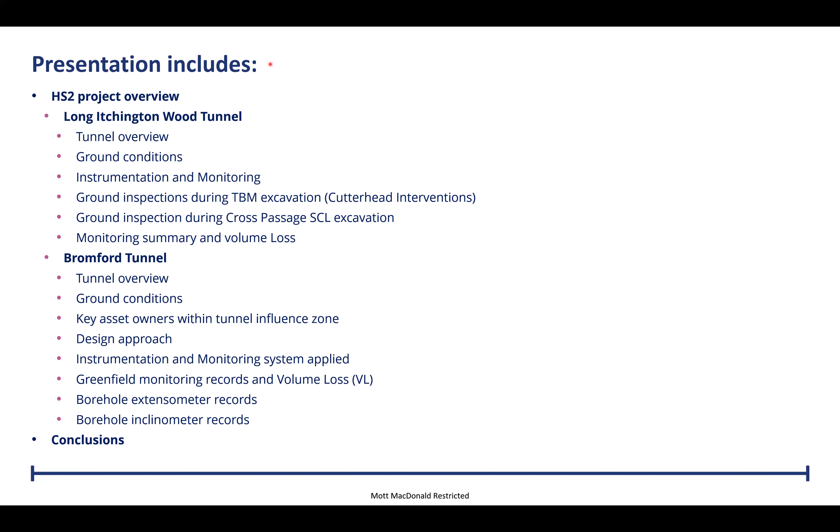This presentation will include an HS2 project overview, and we're going to speak about the two tunnels that one has been completed, one is ongoing. These are the two tunnels on the north part of HS2. One is Long Itchington Wood Tunnel, and the other is the Bromford. We're going to speak about the tunnel overview, the characteristics, then the geological setup. We'll talk about instrumentation and monitoring, what has been installed, and how we are doing ground inspections during tunneling, either through the TBM or on the cross passage traditional tunneling method. Then we'll see some monitoring summary in terms of volume loss and the performance we have achieved so far. For the Bromford tunnel, we'll speak about the same subject, following the same design approach as Long Itchington, but in this case the tunnel, which is ongoing, is much more critical because it's longer and crosses an urban area, which is why the instrumentation monitoring system applied is much more comprehensive. We will discuss that, see some readings we have so far, and then conclude.

As an HS2 overview, maybe most of you know this already. It's a new high-speed railway built from London to the Midlands, with a length of 140 miles. There are 4 new stations in this alignment, 2 major depots, 32 miles of tunnels, and over 500 bridging structures.

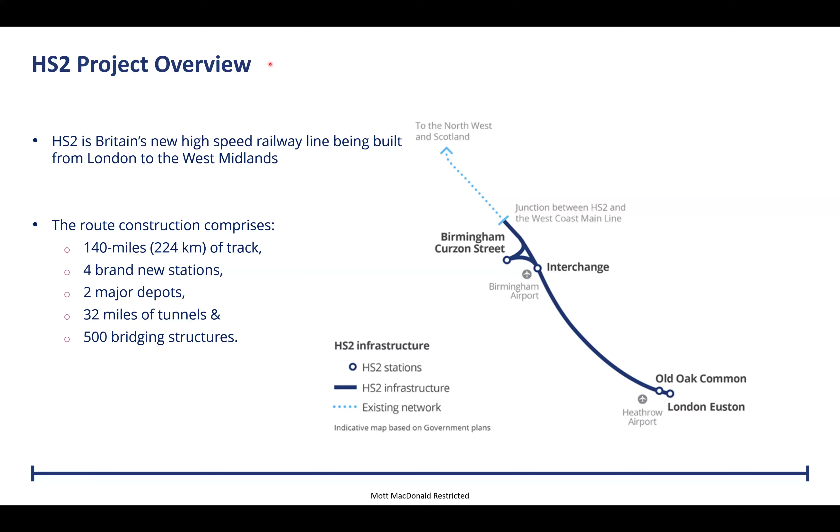Balfour Beatty Vinci JV, which we call BBV, has been awarded the contract to construct the northernmost 90 kilometers of the HS2 route. This starts from Long Itchington, the tunnel which is the first part of our project, located in Warwickshire. Then it goes from the south to the north, and one branch goes west inside Birmingham city, where we have the second tunnel, and another branch goes north, where it will eventually join and connect to the West Coast Main Line.

This contract covers 90 kilometers. Among other things it has 11 kilometers of viaducts, 62 overbridges and underbridges, embankments, cuttings, underpasses, and a lot of other structures. And then we have the 2 tunnels, which we are going to further analyze in this presentation.

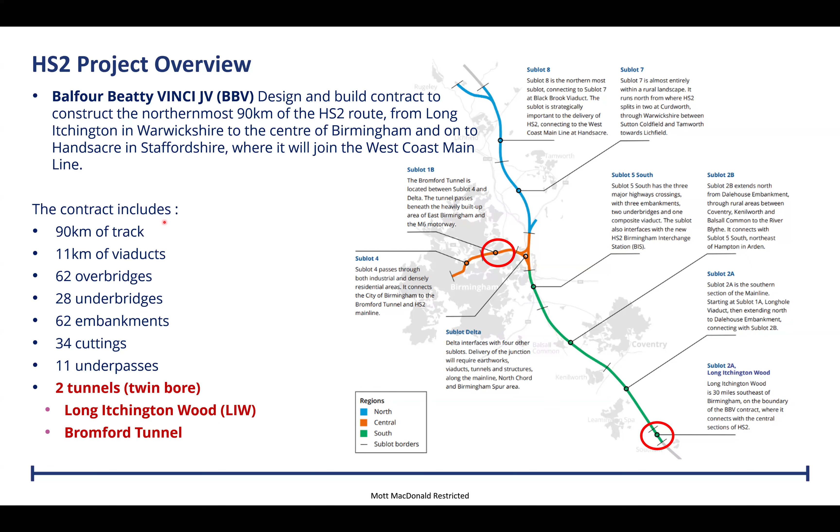So the Long Itchington tunnel has already been built. This photo is from December 2021, showing the launching of the first TBM from the north portal. This tunnel has been constructed with one TBM, which completed the first drive, was then dismantled, all the pieces came back, and then it was put together again to start the second drive.

So we have 2 single bores of 1.6 kilometers. This also has 3 cross passages, which connect the up line bore with the down line. As we said, we used one TBM called Dorothy. The excavation diameter of the cutter head was around 10 meters, and the internal diameter of the tunnel was 8.8 meters.

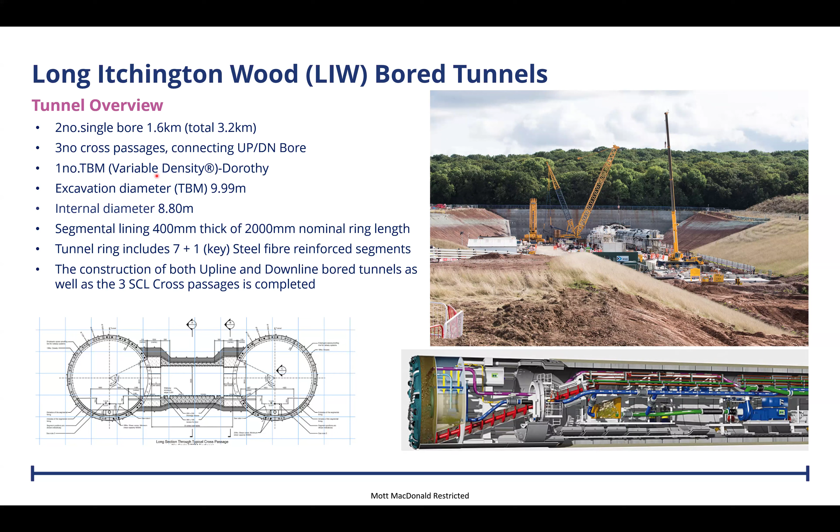The segments formed a segmental lining constructed by the TBM during advancing. We had 400mm thick rings, each ring with a 2 meter length, and a full ring comprised of seven segments plus one key segment, steel fiber reinforced. We also had reinforced rings at the portals and at the locations of the cross passages to mitigate additional stresses. This tunnel, including the cross passages, has now been completed 100%.

In terms of geology, this is the layout, an extract from the 1 to 50,000 scale geological map of the area. On the northern part we have the Mercia Mudstone Group, where we meet the Sidmouth Formation, among other formations shown in the next table. Close to the exit along the drive, at the south portal, we encountered the Penarth Group, which was overlying the Mercia Group.

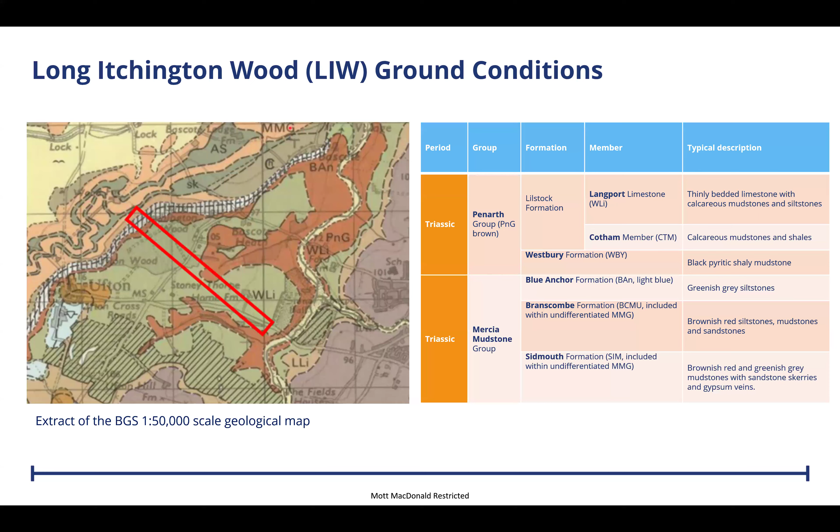So it's better to see the section. That's the section.

This is the north portal, where you have seen the photo, and this is the hill that was the reason for the tunneling. It was an ancient woodland that has been crossed.

Both drives have been from north to south. Regarding ground conditions, we start with the Mercia Mudstone, which has three formations: the Sidmouth formation, the Branscombe, and the Blue Anchor. Then we have overlying that the Penarth group, Westbury and Cotham mudstones, which we encounter towards the end of the drive.

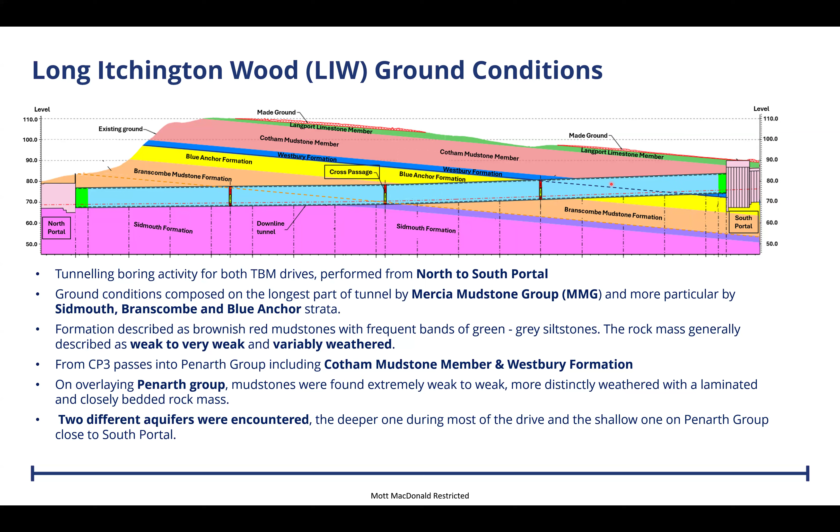The ground is a soft rock, actually. It's mudstones, soft rock. It's weak ground in terms of uniaxial compression strength, and there was a lot of discussion before the tunneling.

Now we know, of course, but there was a lot of discussion regarding weathering zones, and basically what the water ingress in the tunnel would be. We had two different aquifers: the low aquifer, which was in the Mercia Mudstone, and the shallow aquifer, which is in the Penarth group.

However, due to the low permeability of the material, we encountered no major problems in terms of excavation when we had to stop the TBM and when we opened the cross passages.

The design approach was traditional, usual. We had a GI investigation, and once we had the lab test parameters, there was a lot of work done over the past years to define the characteristic values.

There was a big discussion, as I said, regarding permeabilities, because the tests in the GI gave some very isolated results, and we weren't very confident there would not be higher ingress in the ground. That's why we had to introduce uncertainties in the design. However, as I said, in this particular tunnel, as we know now, the permeability was quite low, and we didn't have much ingress.

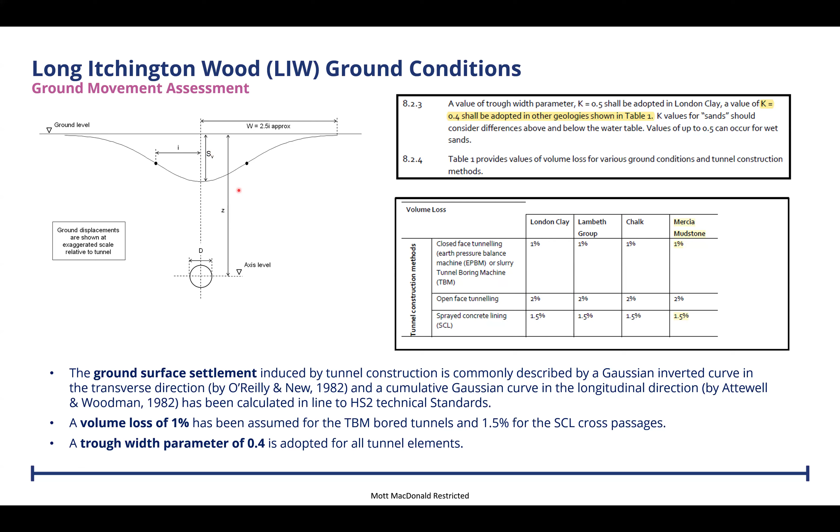Then the second part was to define the operational parameters of the TBM. The TBM is working in a way that has to balance the earth pressure and the water pressure. So based on the GI, the assumptions, the covers, and the waterhead, there was an equilibrium of ground wedge and water pressure design along the tunnel to define the envelope, let's say, of the upper and lower bounds of the face pressure for the TBM.

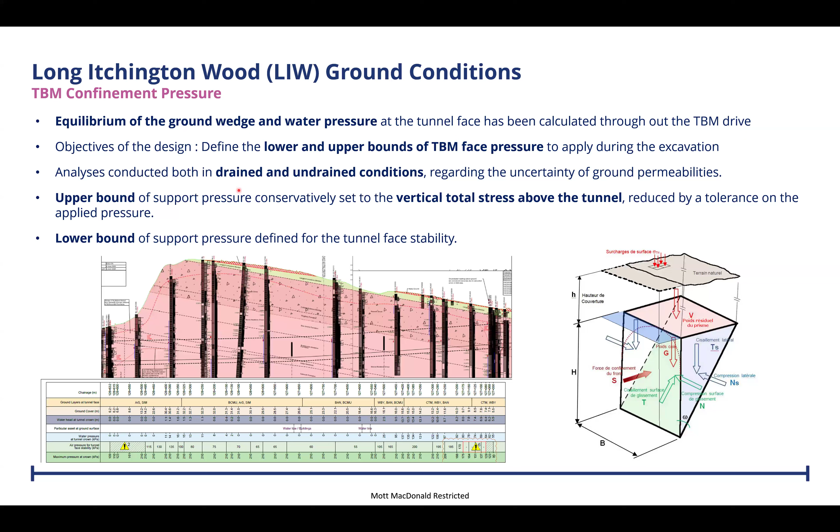The upper bound is basically defined as the vertical total stress above the tunnel. In some cases we have limitations from the design - pressure cannot go beyond a certain limit because the designer of the segmental lining doesn't allow that. But in general, we didn't want to go beyond this vertical total stress. The lower bound is to support the wedge, the face pressure and the water pressure - so to be always a bit above that.

Grouting is a second part that has to be above the confinement pressure. So this design has been done for the tunnel and has been applied, and we're going to see later what the performance was.

Now, instrumentation monitoring in this tunnel was not so critical in terms of assets - it was countryside, more or less, with a few houses. So mostly the monitoring was done in order to understand the behavior of this TBM in the Mercia Mudstone. As we know, there wasn't much tunneling experience in the Midlands, so we haven't got a lot of reference for that.

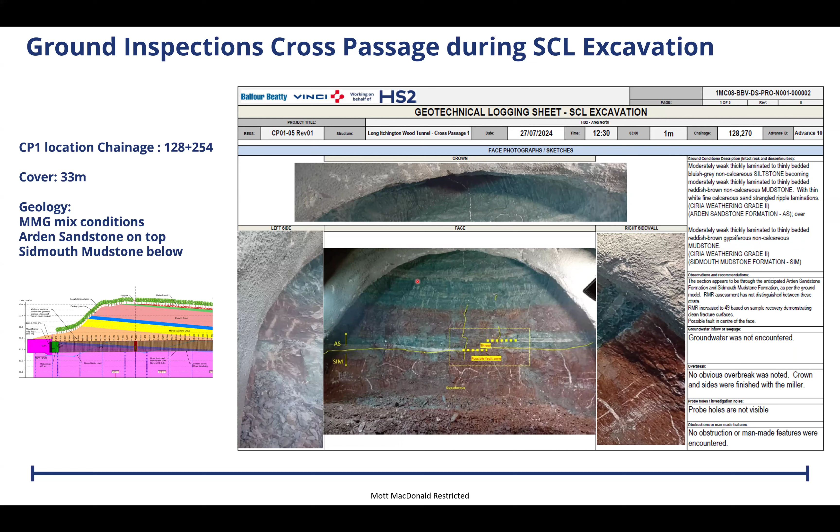That is the CP2 area. We have an excavation CP2 which is full of the Branscombe mudstone formation, and again we had similar excavation logs for each excavation step.

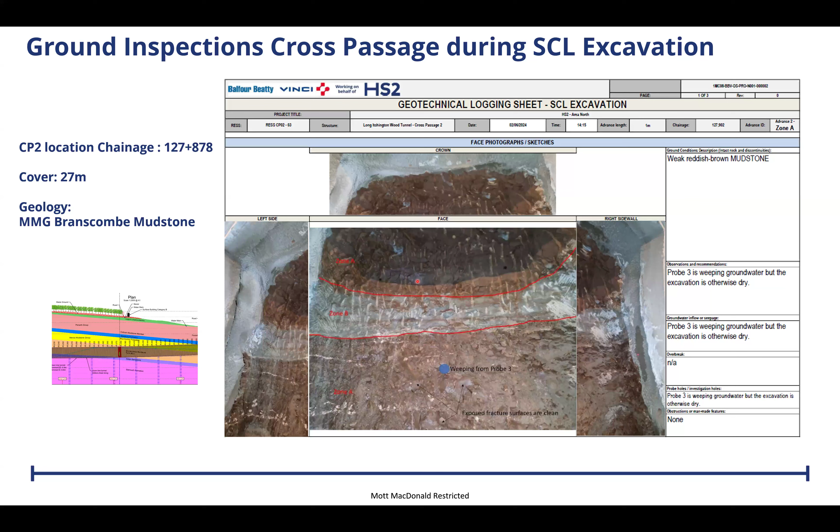And in CP3, you see on top, most of the excavation phase is the blue anchor, and below we see the Branscombe and the estimation by the geologist of the contact.

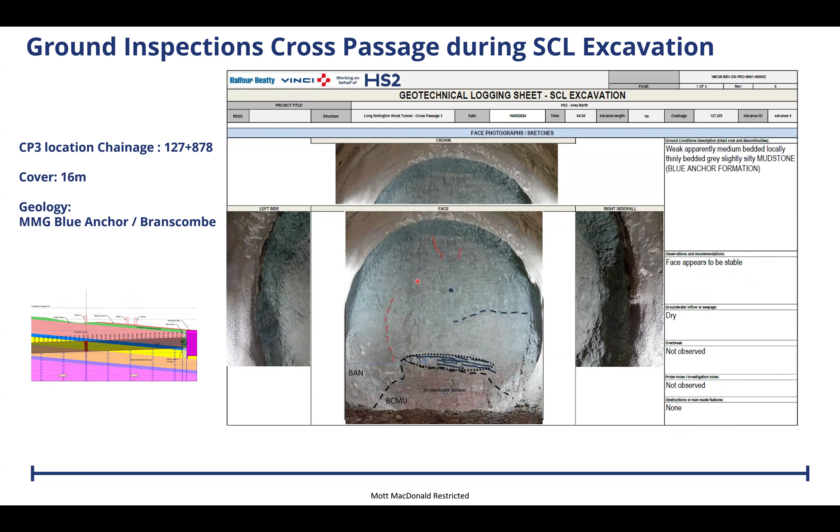So in conclusion, we can say that was the first Long Itchington Wood, the first tunnel completed in HS2. That happened in March 23, both tunnels, and we had quite good results in terms of impact, and very minor settlement recorded. So it was a successful history for us, and it demonstrates that our approach, our strategy, was suitable for controlling the ground.

So that gave confidence to BBV and gave significant experience for the second tunnel, which is the Bromford tunnel, which would be much more critical, because apart from the geology and the length, it also has to cross a lot of critical assets that we'll see in the next slides, and that was the main concern for us.

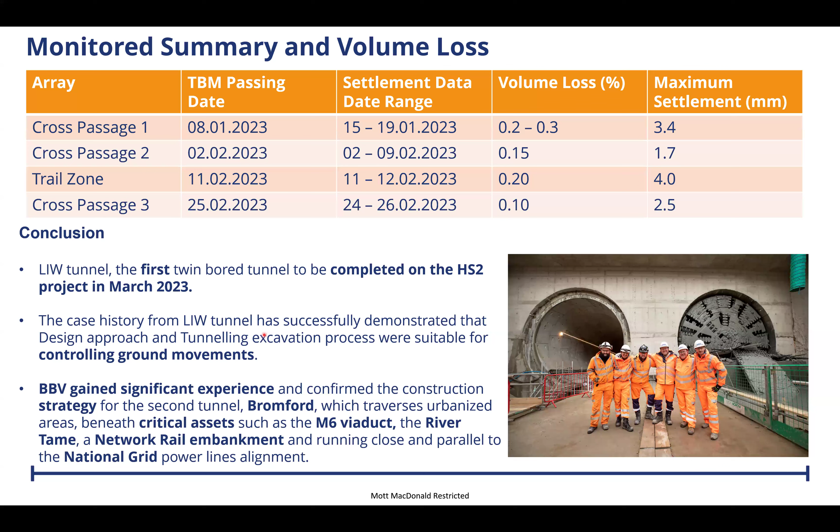So I'm going now to the Bromford tunnel. This is the east portal, constructed with 2 TBMs. This is the down line and then the up line, and this has been, it's 5.8 kilometers in length.

Currently, the downline is around, maybe it's 78% complete. And the upline is around 49% completed. And we have, as I said, 2 TBMs, and there will be 13 cross-passages. The cross-passages have not been started yet. They will start after the completion of the 2 drives.

And this excavation diameter is a bit smaller than the other, because it's where the train is decreasing speed, so you need a smaller diameter tunnel. And there is an intermediate shaft at the middle of the drive, which is 20 meters diameter.

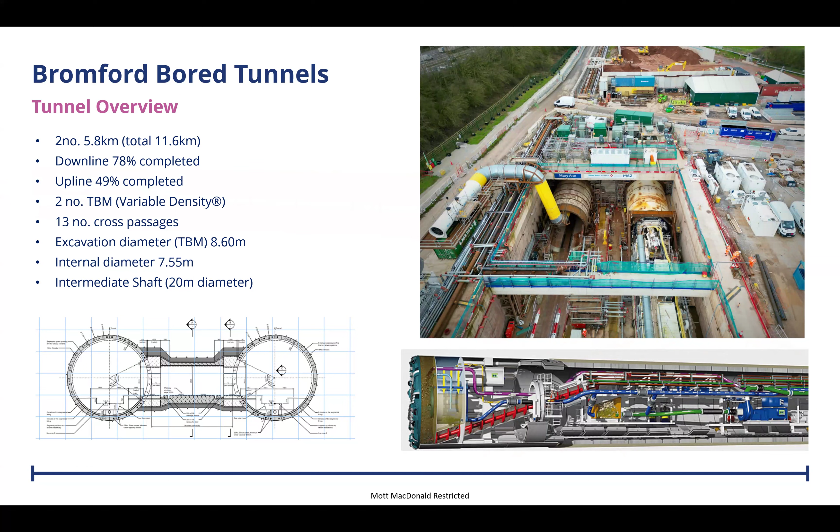So in the geology setup, this is fully in Mercia Mudstone formation, Sidmouth formation. That's why it has been separated into weathering grades. So we have grade 1 and 2, which is, let's say, the most competent. Still it's a weak rock, but it's the most competent part of the weak rock, where we see fully the bedding and the structure of the formation.

And then we have grade 3, where the formation starts getting more gravelly and loose. You cannot even see the formation sometimes, and it gains more sandy and gravelly texture, and the behavior starts to become soil behavior. And then we have grade 4, which is like a clay material, totally weathered material, behaving like a soil.

In terms of groundwater condition, all the tunnel water is considered to be at the ground level almost, or 2 meters below ground level, so it's fully submersible. And the material permeability is considered low, as we had experience from Long Itchington. However, in this case, we have some experience with more ingress of water in some of our cutter head interventions.

So the criticality of this is that we have a lot of asset owners, which is basically the majors, Network Rail, National Grid, and National Highways. There are also a lot of utilities, critical utilities like Esso pipelines, and Cadent Gas.

And we also cross the alignment parallel to the Tame River 4 times, so we have to deal also with the Environment Agency. So there were a lot of third-party asset owners, and we had to go to each of them and get the necessary permits before even starting the tunnel.

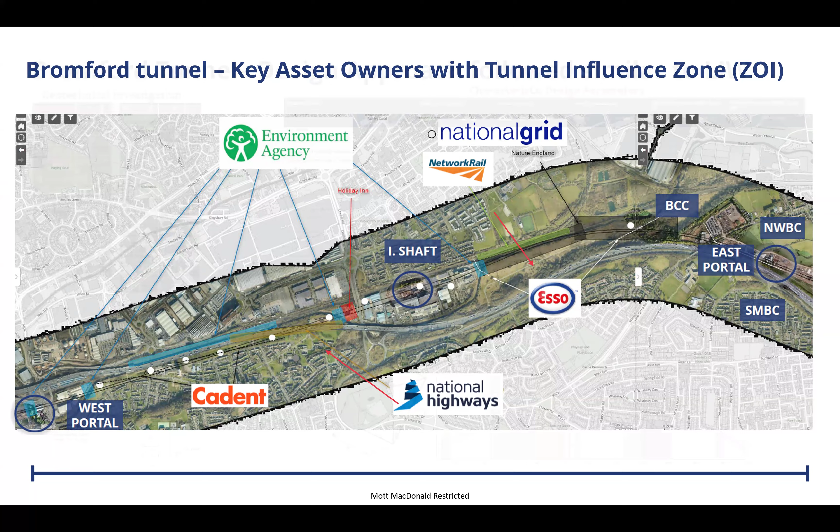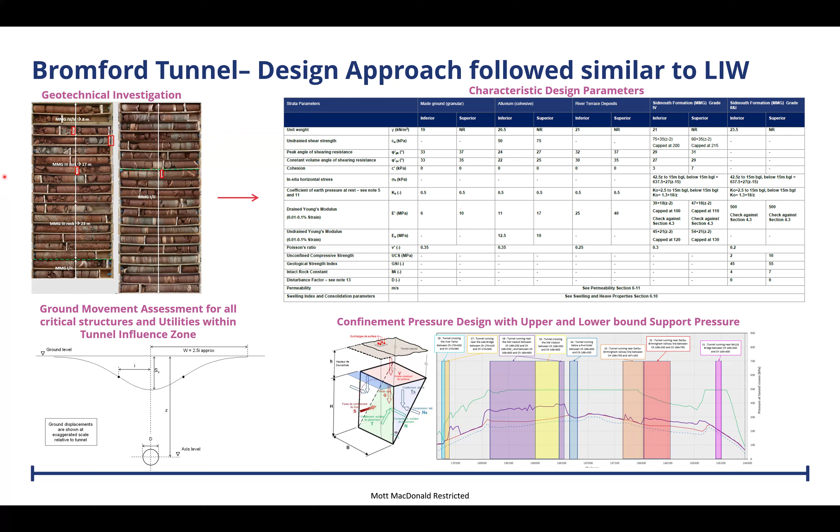We followed a similar approach that was successful in the previous project, and we tried to be a bit more innovative in the way of an I&M system, because we have to deal with particular asset owners. So we have to go to them and discuss the monitoring arrangement for their assets, the structural monitoring, apart from the ground monitoring for the greenfield.

And we have to discuss with them to agree to serve the needs of the specification of each owner, to be able to safeguard the structures, to maintain serviceability during the tunneling, and to be able to alert them in case we had some breaching.

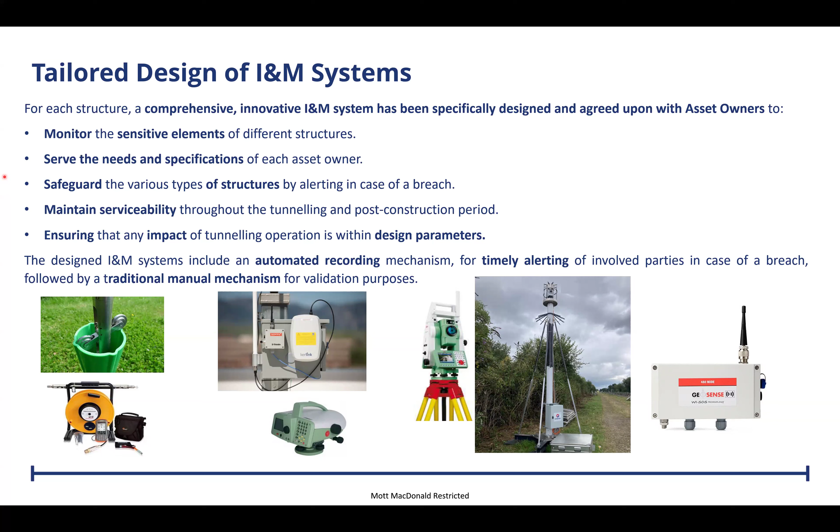So for that reason, we always install automated systems for timely alerting, and also manual systems, in order to be able to confirm and validate the results of the automated system. That was a long job with a lot of discussions and meetings with all the asset owners.

And then all the monitoring data directly feed either automated, or the automated system feeds the database automatically, and every day we also upload the manual leveling monitoring to our database. It's called MissionOS.

Which you can also track the TBM live. And in case we have a breaching of any trigger value, we are sending directly emails.

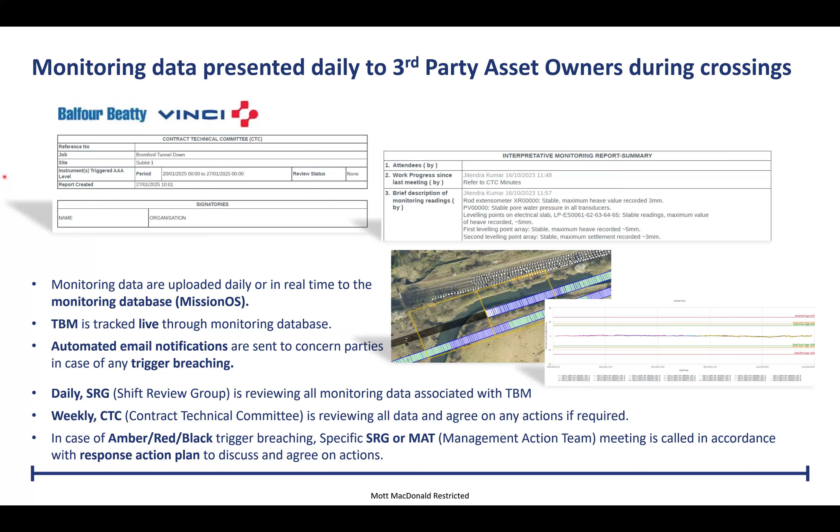Further to that, as per the HS2 process, we have shift review group meetings daily to discuss the monitoring. And every week we also discuss with designers, it's a more broad technical committee, and we invite the asset owners. In case we have any breach, we have a management action team, and in case we have some red, black, or amber, we have a particular action plan which we take depending on the breaching, within 6 hours or 12 hours we have to respond.

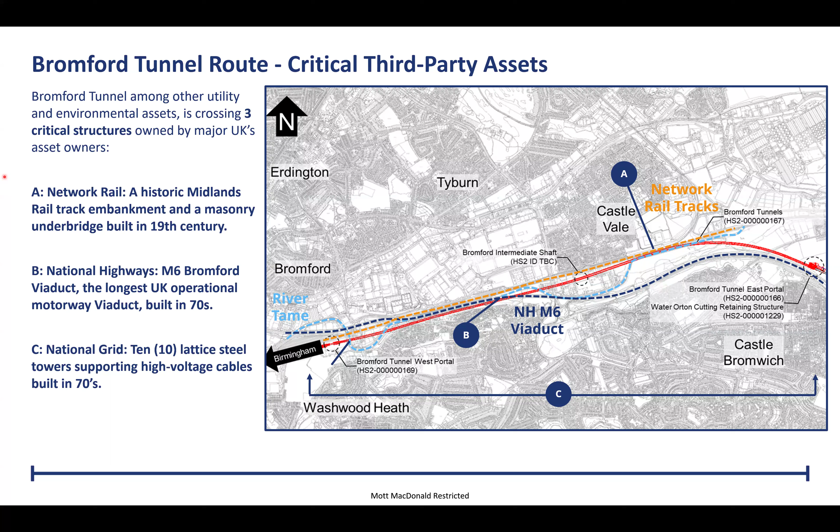So yes, those are the three major asset owners. One is Network Rail, which is a 19th century embankment and the underbridge. The second is the M6 viaduct, which is the longest operational viaduct in the UK, built in the 70s. And also we have 10 lattice steel towers with high voltage cables, also built in the 70s, that we have to deal with because the influence zone is crossing this as well.

So for Network Rail, we have to follow Network Rail requirements. We have to install automated total stations. We installed 11 ATS total stations, more than 3,000 prisms and instruments and tilt meters on the tracks. And on the underbridge, we have a particular agreement with the Network Rail assessment using SAAs and tilt meters also.

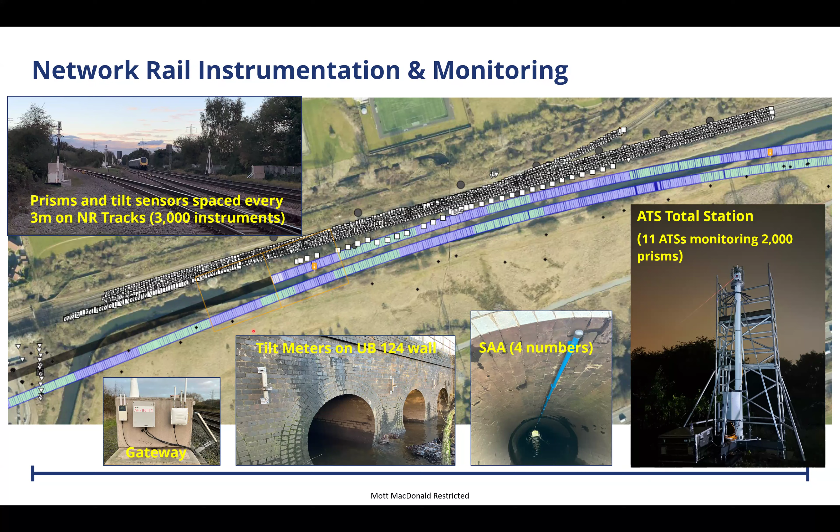And everything had to go automatic. We had readings every hour, sent every 6 hours to our server, and had the readings available online for everybody, including the asset owners. Both tunnels have crossed this area, we are happy for that, and it shows actually negligible effect.

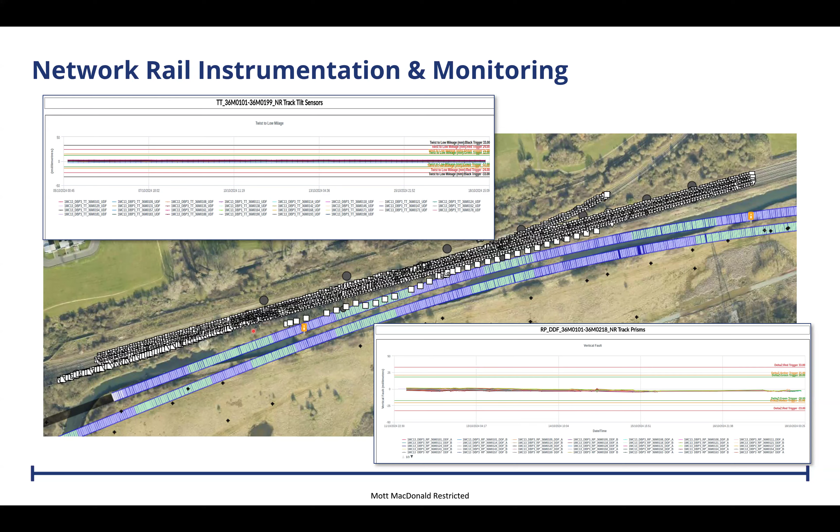So after that, Network Rail also allowed us to remove all the instruments, and we are doing the decommissioning this time. The second was the M6 viaduct.

That was even the most critical, let's say, with a lot of design support for the structural instrumentation. We had a lot of instruments on the structure, further to the ground instruments. We had hourly readings, and we had several meetings, daily meetings and weekly meetings, with National Highways.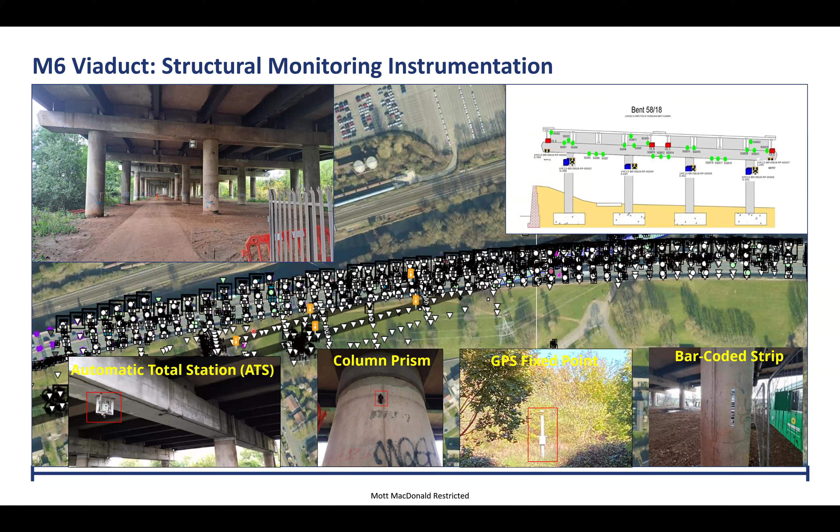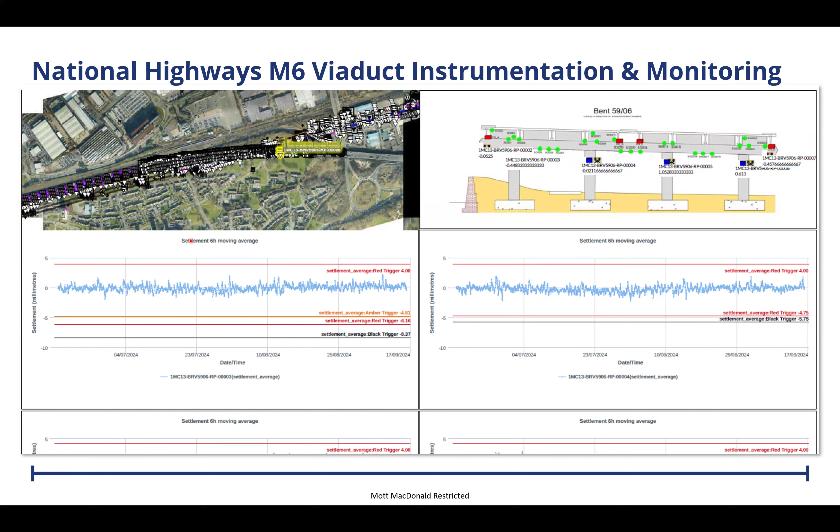And in April, the second TBM will also cross, so it will be a big milestone for us if we cross the second TBM under this structure. This is the results that we have. You see the usual automated spikes, but we kept everything within the acceptable limits, which were very, very tight, like 4mm, we should not exceed 4mm. That was very tight for us. We were afraid of having spikes and unnecessary breaches, which happened one time with National Highways, but generally we managed to maintain within this level.

And finally, it was the National Grid. This was more simple, we put leveling points and reflecting targets on the legs. And we had automated tilt meters on each leg in order to have automated results as well, not only manual. Here again, we had very good results with very minor impact during the TBM crossing.

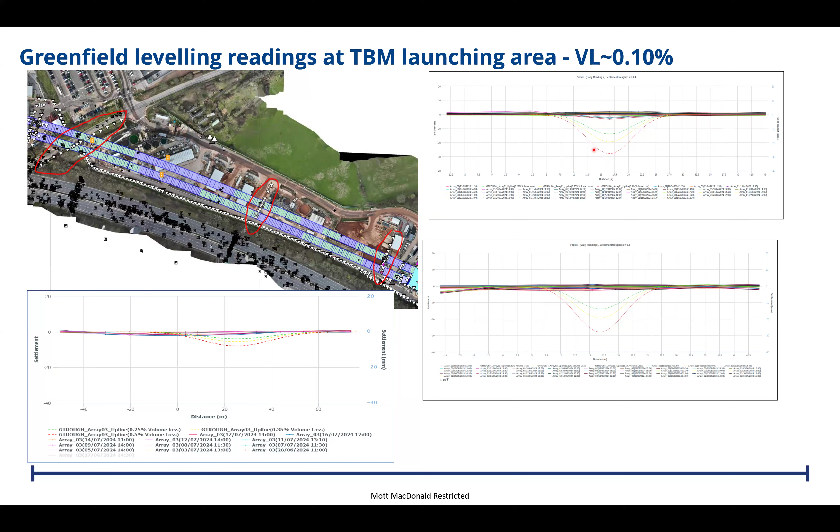Finally, I want to give you some indication about how this behaves in the greenfield. So we have the greenfield area, this is the area of the launch, which is a low cover area. We have quite strict trigger values here, but however we managed to have a quite low volume loss. The red threshold is 0.5%, and we managed to have much less in all these crossings.

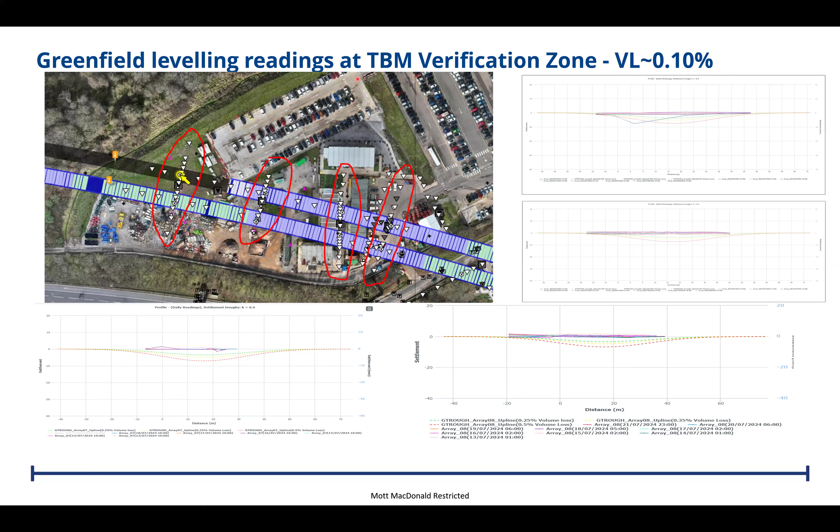Then we also have another verification zone, where we installed a lot of instruments in order to understand the behavior before it goes into the urbanized zone. This is the area of the site, we had our own land, so we took advantage of this and installed a large number of instruments. The behavior here was quite good as well.

Finally, this is the urban area. TBM1 is still ahead within the urbanized area of Birmingham, however, we still have quite good results.

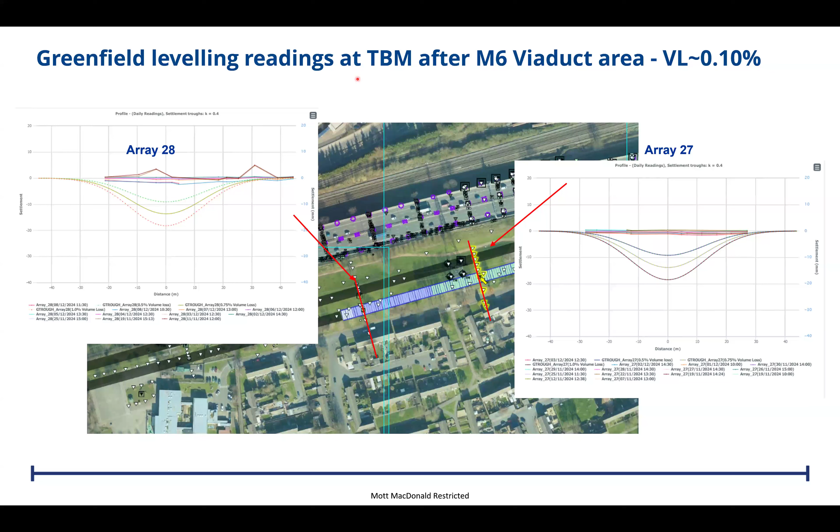Because these take readings automatically every hour, we are able to understand the behavior as the TBM is approaching the instrument. What we basically see is that only the sensor just above the tunnel, about 3 meters above, has been impacted, and this is only a couple of millimeters, not more. The other sensors above didn't show any impact.

We analyzed further to understand when this impact happened, to see if there was any influence ahead or behind as the TBM approaches. We found it comes just directly when the TBM cutter head reaches this area - we have the first drop, then while the TBM is there under the shield it continues, and when we install the ring and grout back, we get a straight line after that. It takes around 12 meters, 6 rings, to pass through and go from previous stability to stability after tunneling.

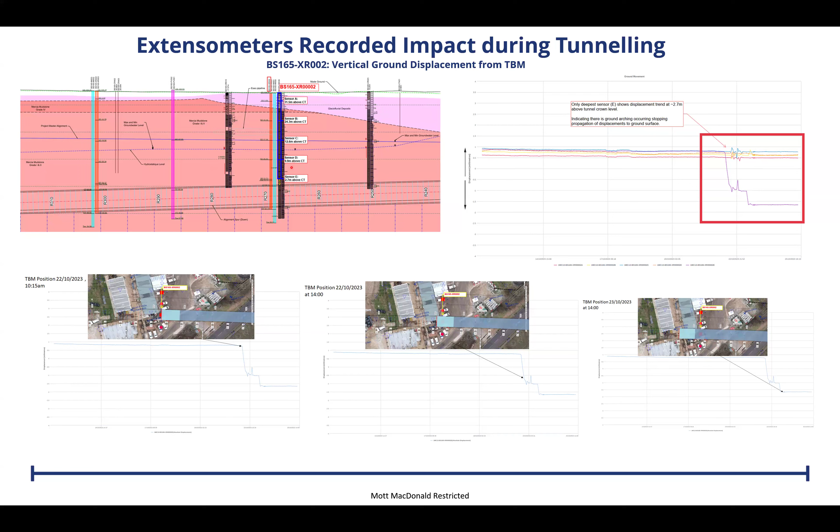The good thing is that vertically, the relaxation zone of the ground was not more than 4 or 5 meters. We didn't see more because this was 3 meters and it moved, but above it, around 7 meters, didn't move. This is similar but shows the displacement ring by ring, so we can analyze exactly how it behaves with the confinement pressure, then the cutter head, then the shield, then the grout.

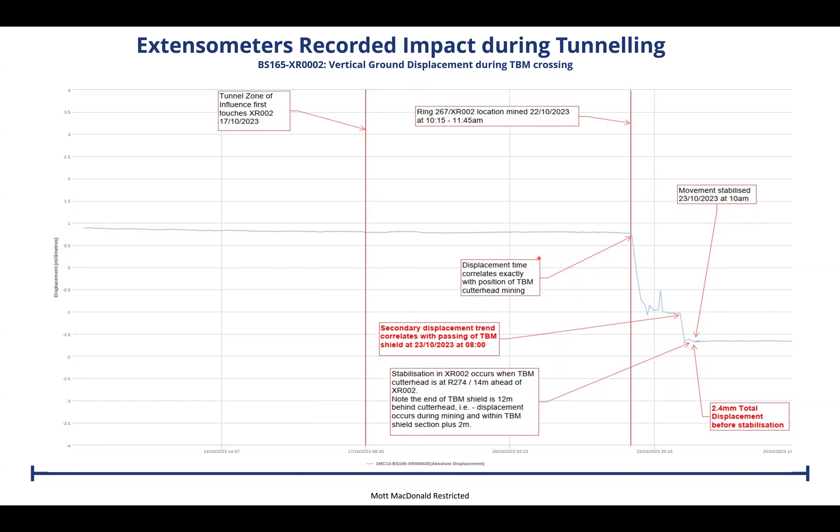We had this same picture in other areas - again only the bottom sensor has moved, not the other ones. So we are more confident that we maintain the movement and relaxation zone within the TBM in the Mercia Mudstone, in this geology, to an area of about 3-4 meters around the tunnel only, and we are able to kill any further settlement.

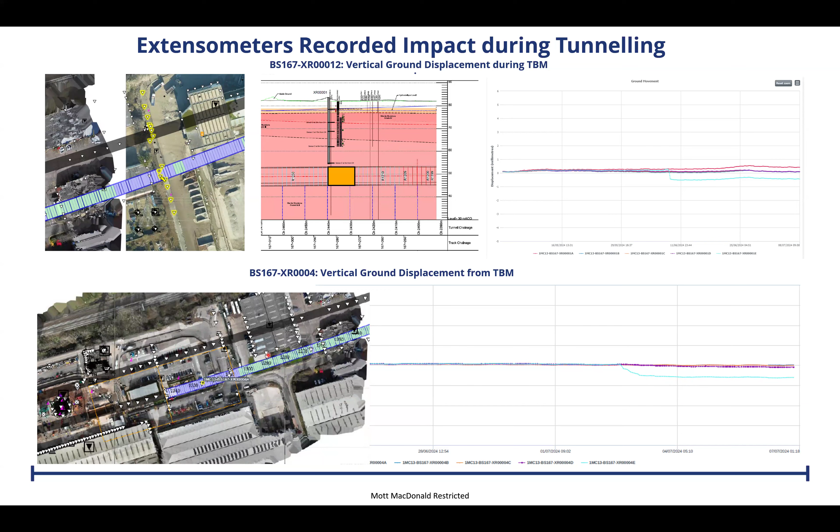Then the inclinometer shows the lateral movement on the TBM. We have several positions, and on the tunnel level we have a lateral relaxation which is not expanded above. So it stays there, and after the TBM crosses, it stops increasing.

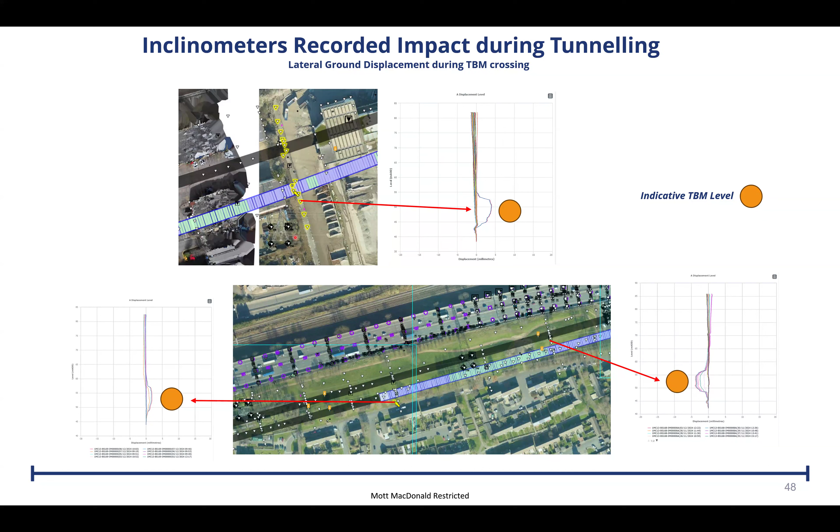We shared this with the tunnel teams to apply it in the Bromford tunnel. We increased the monitoring, instrumentation, and all the arrangements because the Bromford tunnel was much more demanding, and so far we are quite happy - we have no structural impact and volume loss below what was expected by the design.

Through the TBM cut intervention and the SCL cross passage, we are able to record and keep records of all the excavations, to understand the geology, behavior, and conditions of the Mercia Mudstone. During tunneling, we do back analysis with the monitoring data, and we use the TBM to optimize tunneling parameters to maintain better mining performance in terms of reducing the ground impact even more.